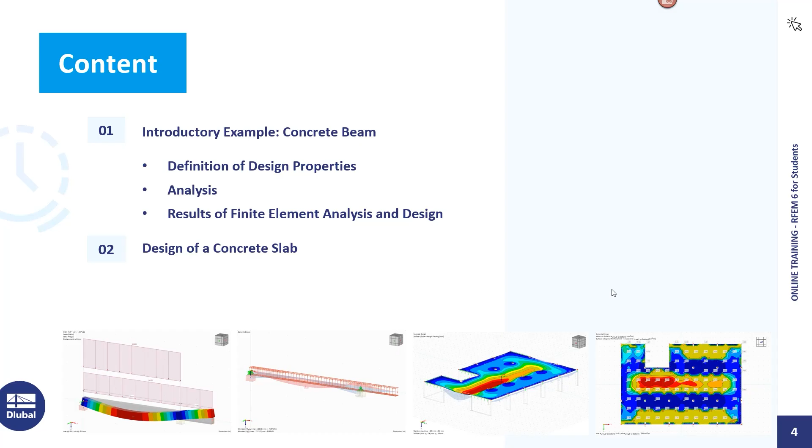Now we will go to the program. We have here our RFEM 6, and we will open a new model. We have this button to open the next model, and the first thing we do is come to the base data where we can give it a name, and this will be our concrete beam. This is the name, and all the default settings in this register we will keep.

Now we go to the next register, which is about the add-ons. RFEM 6 is a finite element program. With that you can do the finite element analysis for your model, calculating inner forces, deformations, stresses, strains. If you want additional analysis, you can add the add-ons here, and today we want to do the concrete design, so we have to switch it on. With this action, the main program will be enlarged, and it will get the options for giving input, the analysis, and the results for the add-on you activate, added directly into the main program.

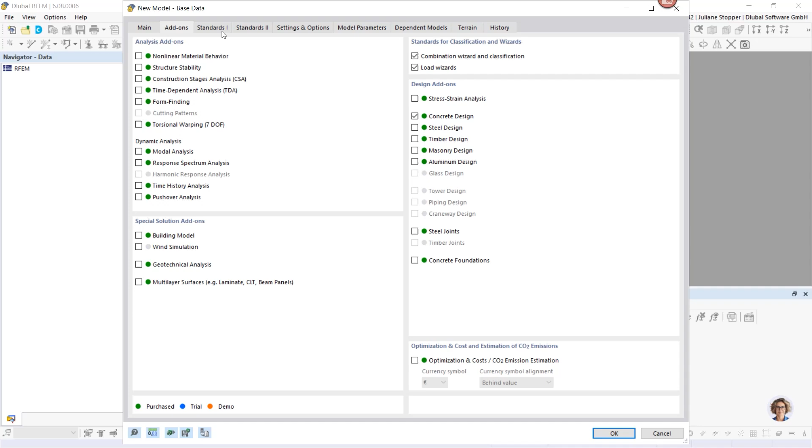What we need to do for concrete design is go to the standards, as we have to tell the program according to which standard the design shall be done. We have here the Eurocode and the National Annex. We keep these settings and agree. Now our model is prepared, the file for it is prepared, and it is empty. I will open this more so we can see it bigger.

I want to show you the files in RFEM 6. They always provide some default options. The program keeps in mind which materials and which sections you used the last time. It can help for a new project, but for us now we want to start from scratch.

Therefore I delete all these objects so that we can start in a fresh file.

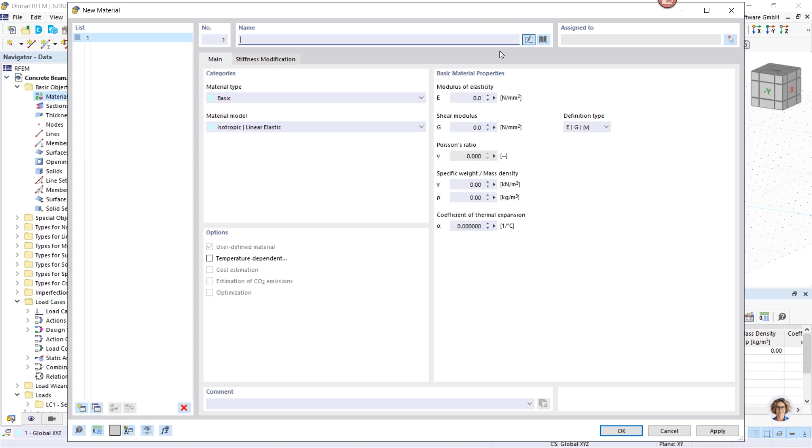So what we do now is we go to the materials, and here we create a new material, and we provide here the library. We can go into here and select our concrete, and it is important that you take care that the standard according to which you want to do the design matches the material you select. So we have C30/37. I accept that and go on apply.

Then I can see also here on the navigator that it is added. And I want to have another material.

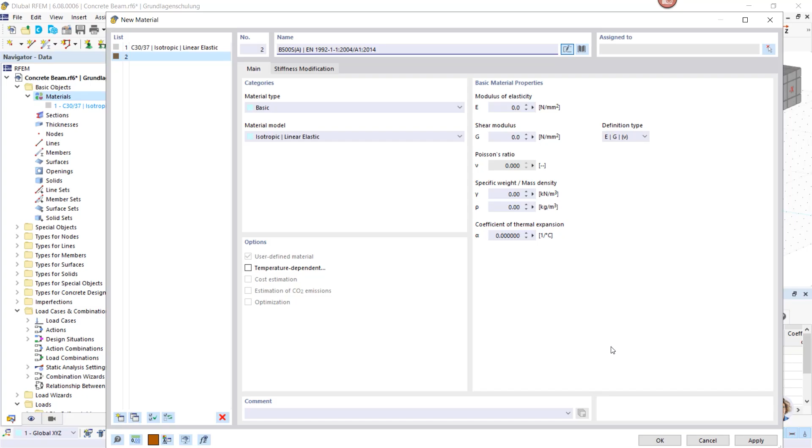I also need the reinforcing steel, and I want to show you another way of giving the input. If you know the name, you can also directly enter here the name of the material and then take it from here. I want to take this one, and it does the same actually. You give the name and then it takes the input from the library, but it can be faster if you know the names.

Okay, now we have the materials assigned, and you can see that it is written in blue letters here. This means that these objects are prepared in that model, but they are not in use. We will later see that if there are objects used in the model, then the letters will be black. So it's a good way to make it easier to control, to see if you missed the assignment somewhere.

Okay, then we can go to the sections. We want to create the section for our beam, and this is the dialog for it. Equal to the materials, we also have a library for sections. You can enter here, and you can see a lot of different sections we provide in RFEM.

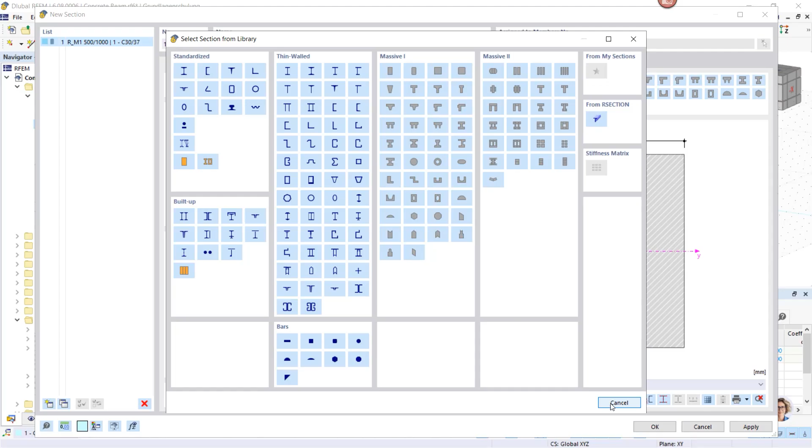But I want to cancel this. I want to show you here on the right side, we also have a list of common cross sections that are used. The program automatically adds here the first material of the list. It fits for us, since we want a section with a concrete material, and for this material it proposes these cross sections. We want to use the rectangular, so it's fine for us.

We can go to the next register where we can enter the geometry for our section, and we will have 300 in this direction and 450. And I can say OK. And then I have my cross section prepared, and you can see it uses the concrete, so this became black here.

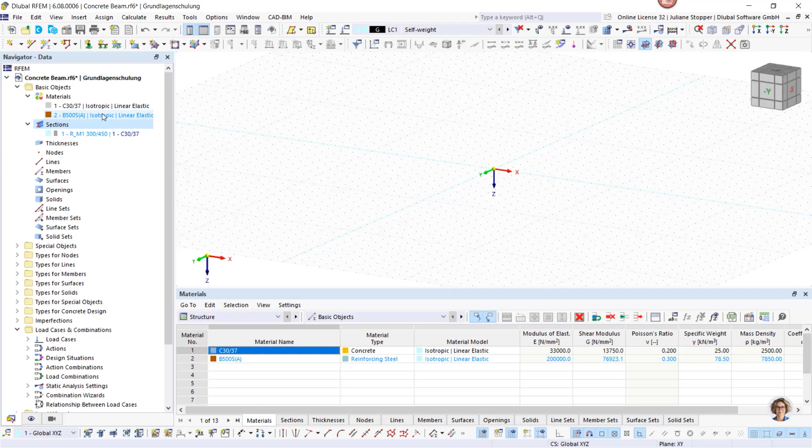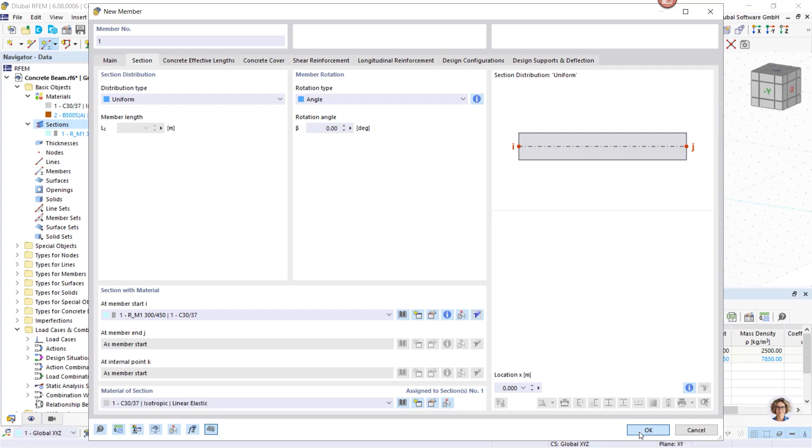And now we can directly model our beam. We have therefore here this menu, this button, to create a new single member. I click on this and I create a member, and I can also check here the section - yes, this is the section I did define. And now I can start, and I have the grid points here. So I want to start at 0, and our member shall be 8 meters long. With the grid here, it's quite easy to find the 8 meters. I click on the grid point and my beam is defined.

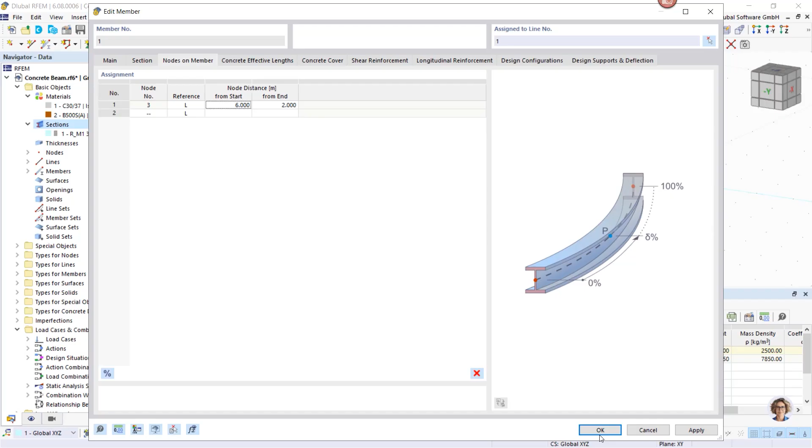Now I want to add a node in here, in between, in the member, and we have a special type of node we can find. For example, if we do a double click on the member, we come back to the member menu, and here we can use the option to define a node on member, or more than one, but we only need one. As I activate this option here, this register comes - you can see it's not here, now it comes - and I can enter the position of the node. I don't want to give the data in percent, so I click here and now I can give it in meters, and I want it placed 6 meters from start. I go on OK, and now you can see that here I have an additional node.

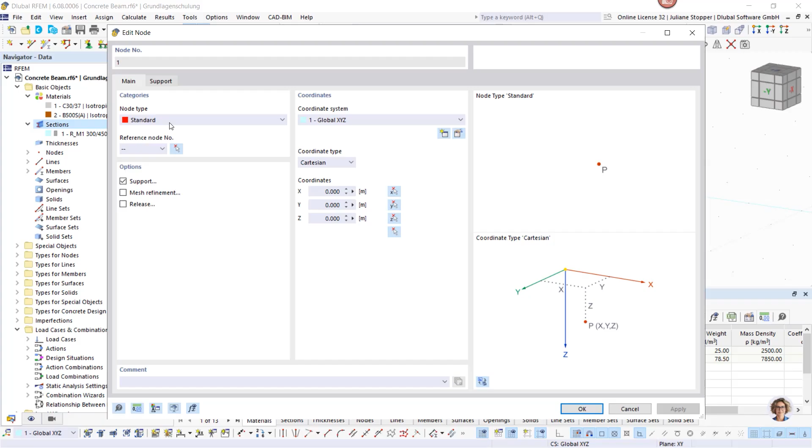Okay, now we have the beam. What we need now is to define the support. I select the member start, double click on the node, and I'm in the nodes register, where I have the option to assign a support. The special register for that option opens up, and here I can create a new nodal support for this node. I want a fully fixed support, so I go on OK, and then this node is supported.

We can see the green indicator here, and I want another support at this inner node. I go on support again and create a new support, and this time I want a sliding support. I use the one which is sliding in X direction, and I also want this to be fixed for rotation about the X axis. Okay, I go on OK.

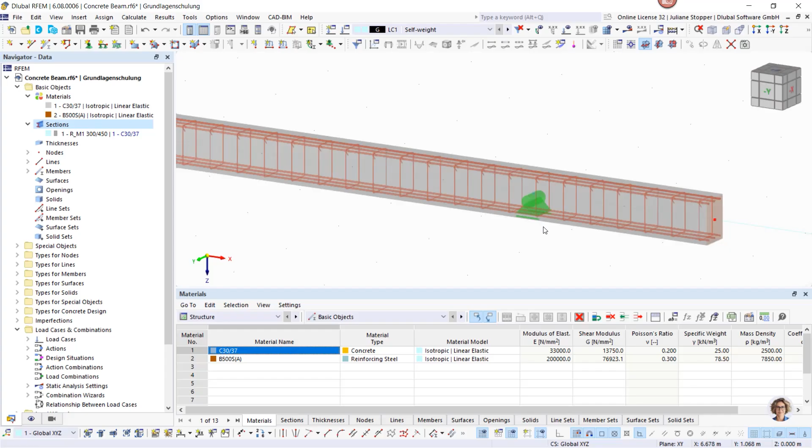With this node on member, we have the option that there is a node at that member, but this node doesn't divide the member into two parts. This is quite helpful if you want to do the concrete design, as the reinforcement will then work as for one member.

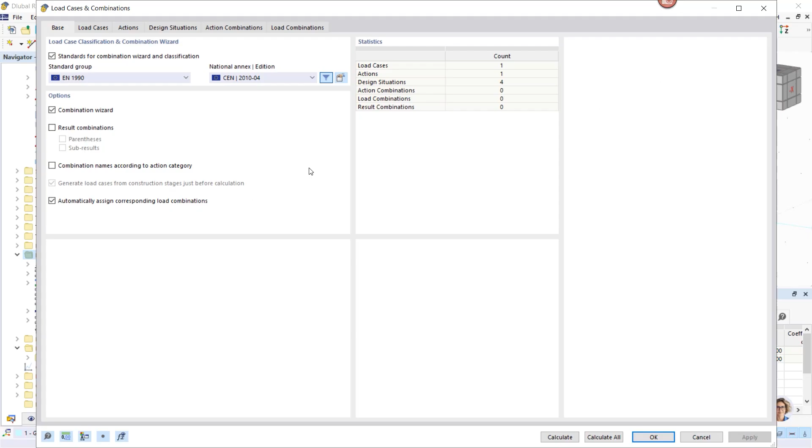Okay, now we have our beam ready. What we now need is the loads. So we go a bit further down in the menu, and I right click on load cases and combinations. We see the dialog here with the load cases. What the program provides as standard is a self-weight load case, and we have the self-weight active.

Now we add a further load case, and I want to have a dead load case, also from action category permanent. I go on apply and create a new load case, and this will be a live load. I select this action category - it is important to select the proper action category, as it decides how this load case is considered in the design situation in the load combinations. So this is my live load, and I call it live load 1.

You will see later why, and I copy this load case and create live load 2. So then I go on apply again, and then it is in the model. Now we can go to the next registers and have a look at them.

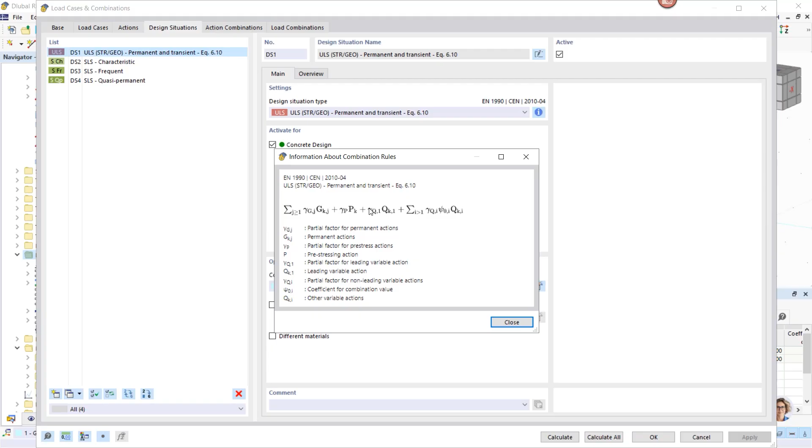Here we see a list of all the action categories we have in the model, an overview. Then we can go to the design situations, and these are the design situations used for the different design checks. You can always click here on this info button for all of these, and there you get the info about the combination rule used for creating the load combinations, so it can be followed.

And we have here the frequent design situation. You can see that all of them are now used in the concrete design, and I can also deactivate it and say this design situation I don't want considered in the concrete design, as I don't need it right now.

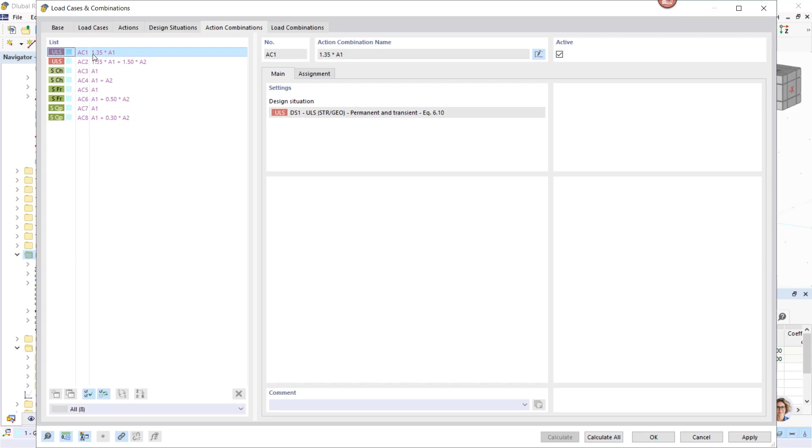Then we can go to the next section, where we see how all the action categories in our model are combined. And then we can have a look at the load combinations. This is the list of all load combinations automatically generated for us, as we have the combination wizard assigned. If you switch it off, you can manually define combinations for this design situation. If you have it active, as we saw, the load combinations are generated. I go on OK, and all my load combinations are prepared.

Now we have to fill these load cases that we have prepared with loads. We look here, we have a different folder for every load case, and we now go to the dead load. I want to define the member load, and I use this button here, new member load. I go on and start with the dead load.

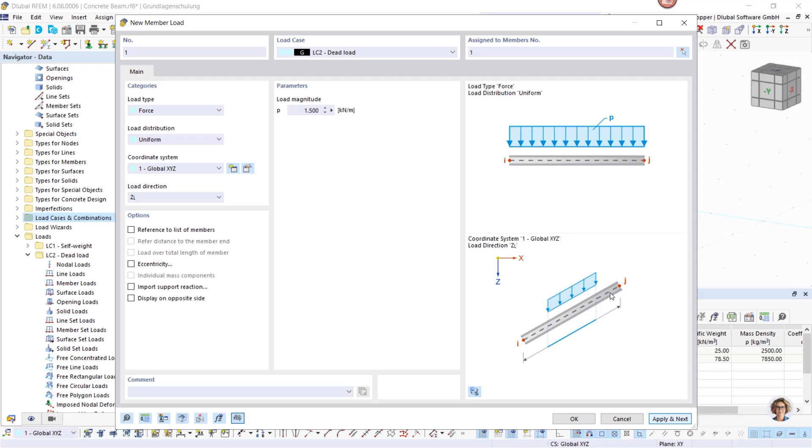I can select the member, and I want to have 1.5 kilonewton per meter assigned, and in that direction this is fine. All these settings can be kept. Now we have this button, apply and next - I want to use it because I can then stay in that dialog, and we can have a look here at the background. The load was defined, and now I can go to the next load case and define my next load, still for member number 1.

Now I want to use another load distribution. I'm using trapezoidal, and I use 20 kilonewton per meter at the end and at the start, and the load shall reach from the beginning up to 6 meters.

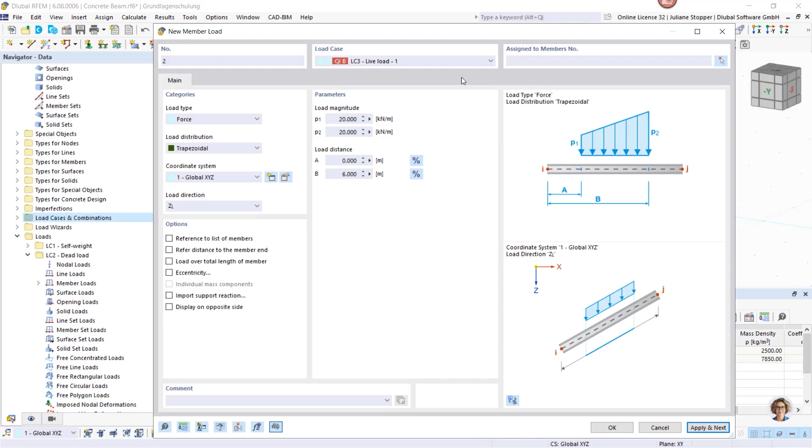I go on apply and next. Now I can see that this load case, the live load for the first span, is defined. Now I can go to the second, member 1 again, and change it here. It shall start from 6 meters and reach out till the end of the beam. I can now go on OK, as it is fine for me to leave that dialog.

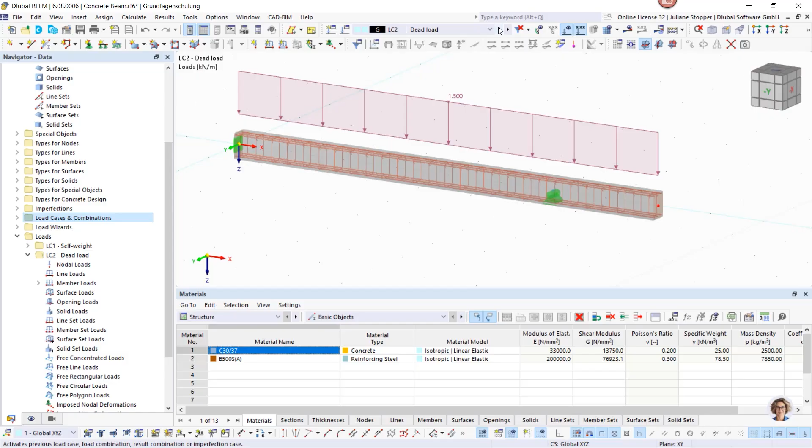So now we can check them. We can go backwards. We have this live load, we have this live load, we have the dead load, and we have the self-weight load case. It was the one with the self-weight active in the dialog.

We can also see that if we go here on the navigator for display, and here in the loads, in this navigator you can control a lot of settings for the display in this main working window. We can here activate the self-weight, and this is the self-weight that is automatically calculated for us with the cross-section and the material's weight. Here we can see what the program calculated.

Then we can also see here our load combinations. The program shows us the factorized loads, and we can have an overview about what is assigned in this load combination.

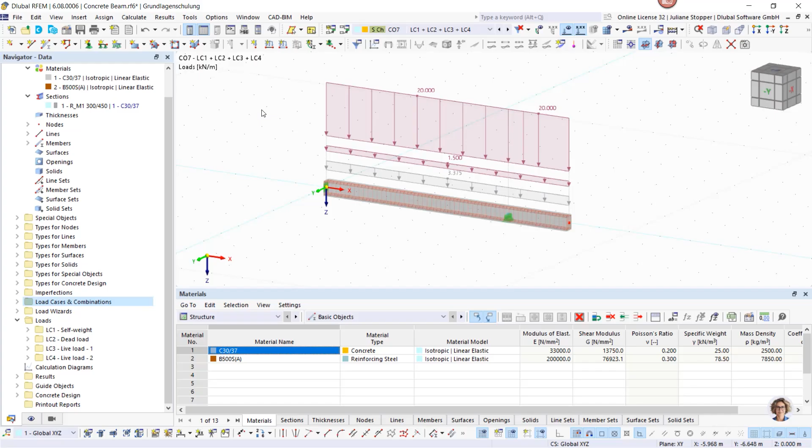Now we are at a point in the modeling process where we could start the finite element analysis. We have a system, a structure that has boundary conditions for geometry and for loads, and the finite element analysis could be started.

But as we want to do the concrete design as well, we will now have a look at the design properties for concrete design. Therefore, we go here to the member, and we can see here the design properties. This appears here as the program has the concrete design active, and as soon as an object is of concrete, then these properties are available.

And we could also switch them off. Then we would see the pure dialog for the member, how it would look for the member. And if we have it not active, this member would not be part of the concrete design, as it has no concrete design properties. But we want it to be designed, that's why we switch it on.

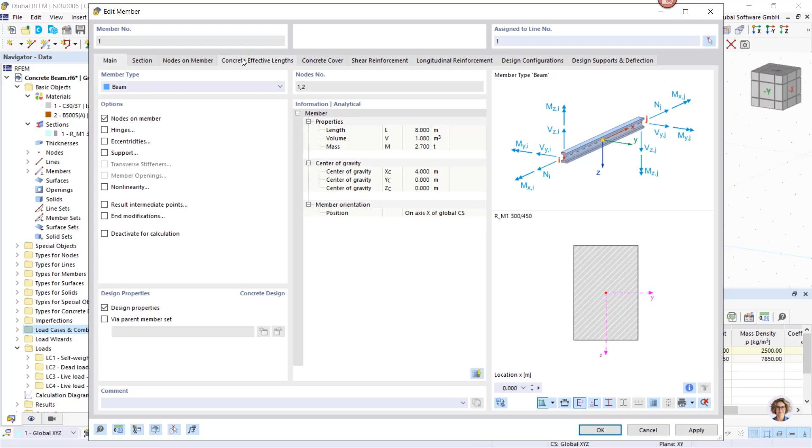And then we can go through the concrete design registers. So the first option is to define an effective length. This effective length is used for the stability design with the equivalent member method. And as we now have the beam which has no stability problem, we don't need to use the equivalent member method, and therefore we don't assign the effective length here.

We can go to concrete cover. This we need. We can give the concrete durability. We have a default value here, and with this button we can go on edit and have a look at it. Here you have this helpful graphic, and you could also change it if necessary, or add further exposure classes, and also set additional options if you need. But we will keep the standard settings, and we will go on.

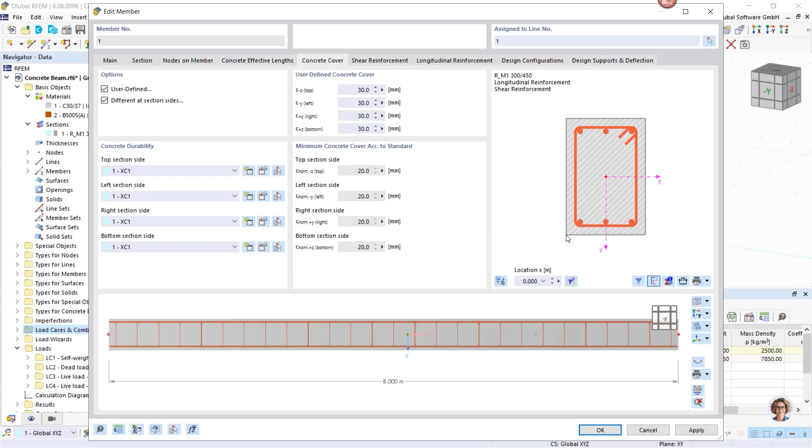If we have the concrete durability defined, then the program can automatically calculate the concrete cover according to the standard that we have selected for the design. But it is also possible to give a user-defined concrete cover, and it is also possible to define it different for the section sides. This can be needed if one part of a column, for example, is at the outside of the building and one part is at the inside, or something like this. But we keep the default setting.

Then we can come to the reinforcement. The first register is for the shear reinforcement, and for both reinforcement registers we have here at the beginning the type of reinforcement that we can select. We have the stirrup type, and we have now a 2-legged stirrup, but we also provide 3-legged stirrups. We stay with 2-legged. And here's the material.

The material is automatically the first reinforcement material you have in your material list, selected here. It is assigned here, but you can also change it if you have further materials in your model. Then you can define the stirrup parameters, and we want to use 8 millimeter stirrups. You can also define the distance for the stirrups, and if you need, you can also define further fields of stirrups, with different stirrup reinforcement area in different parts of the member. But we keep now the setting that we have one field along the whole member.

Okay, that's it for now. We keep it like this for the shear reinforcement. We can come to the longitudinal reinforcement.

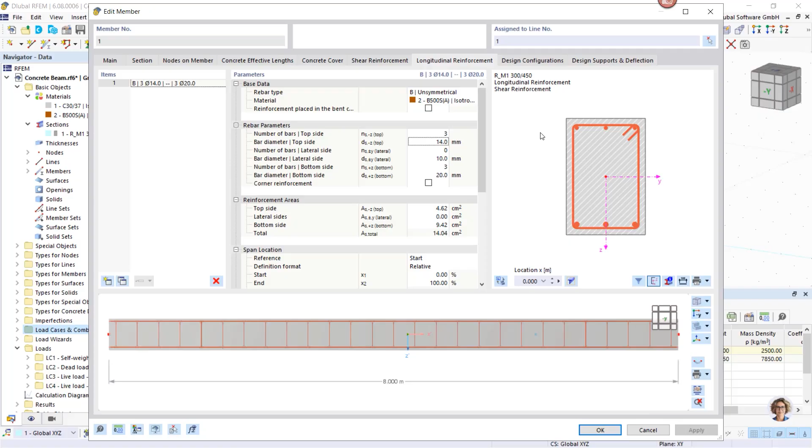Again, it also finds the reinforcement material, and we can also see here the reinforcement area as information. Then you can check whether it fits to the values you would like to have. And the same was available here also. You see also the area for the stirrups. Yeah, this is the reinforcement we want to use now in our example. I go and apply once in a while, and then we can go to the next register.

Here we have configurations assigned, and we can go into the ultimate configuration. Here you have selected all the settings that we provide according to the design, according to the selected standard. There are several options provided also in the standard and also in our program, and you can go through these points and select the settings that fit for you.

You can, for example, unselect the detailing rules for the members if you wish to have a design that is led by the ultimate state, but you also can have it activated, as it is here, if you wish to consider the minimum requirements of the standard and so on. We have here also the option to do the design for the shear joint, which we don't need here.

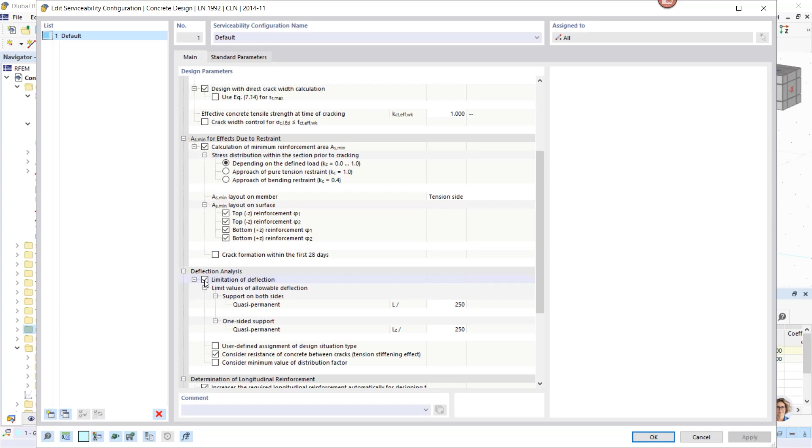For the rest, we keep the default settings. And we have it similar for the serviceability limit state. Here also you can select which checks you want to do. We have the limitation of steel stress active, but the concrete stress not yet active. You can activate it, and you have the minimum reinforcement area for crack limitation, and we can also activate the limitation of deflection. I will for now not consider this.

You can select here what you want to have in your design according to that standard. Then we can go here to the design supports. Design supports you also need for the program. It is relevant for design checks. The program needs to know at which node the current member has a support and at which node it doesn't have.

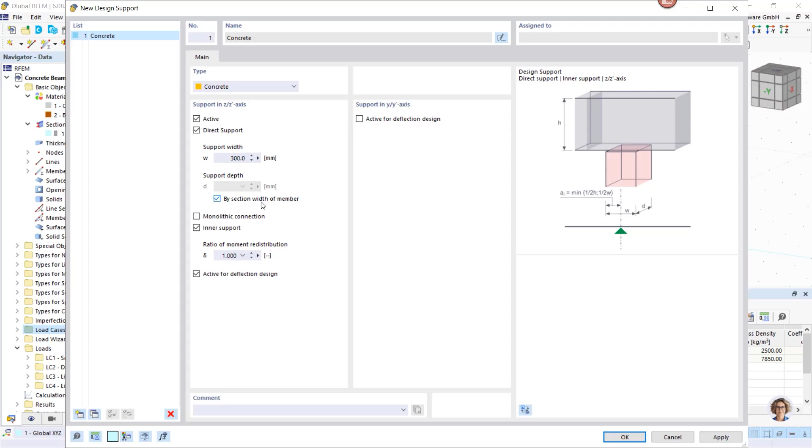Therefore, we go here to the member start and we define a new design support. It shall be considered in the Z direction, and it has that width, and the support depth it takes from the member width. And we have a monolithic connection, and there's no inner support at the member start. So we have this design support, and we create another one, which is an inner support. And we go on OK.

And we have the first support here, which was not the inner support. And at the end of the member, we don't have a support. We have a design support at the internal node, and there we can assign now our second member support. We can see here now the program knows our member is supported here and here for the design checks. We go on OK, and then we have it in our model.

Okay, I think then we are ready. Yes, we are ready. We can start our calculation, and I want to start it from here.

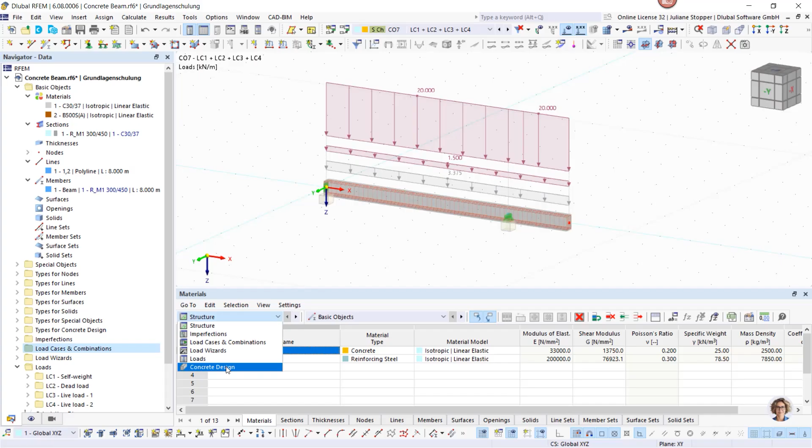We have here the table, and we have all these objects that we saw here, all the objects that we did define. We also have them in the table, and we can have the view of the table too. Sometimes it's useful to work with the table too. And here we can find the concrete design as well. Here you see the design situations that are now considered in the design, and here also you can switch them off if you say you don't want them now, and you can select the objects that shall be designed, and from here you can start the concrete design.

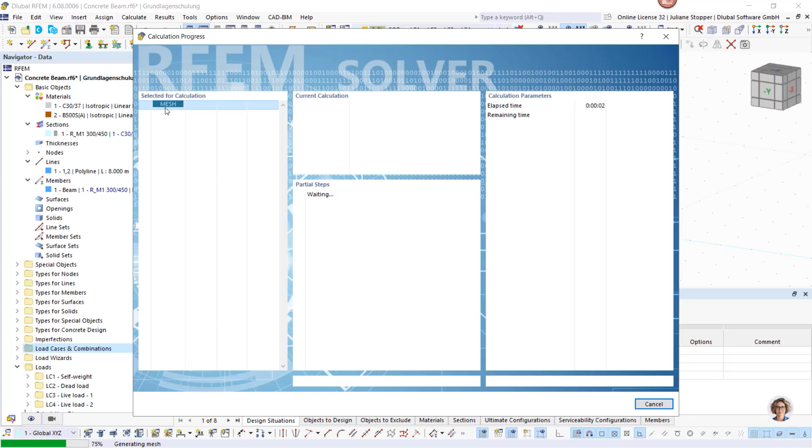I will click on it, and now the program starts with the mesh. And afterwards, the finite element analysis is started. The inner forces, the deformations, stresses, and strains are calculated. And then, as we have them, the concrete design is done with these inner forces. And now we see the result.

What we see now first is the overview for the concrete design. I start here with the navigator for results, and we are now in the concrete design. But it's always possible to go back to the static analysis. Here you can find the results of the finite element analysis, and you can check, for example, the deformations, whether they are plausible.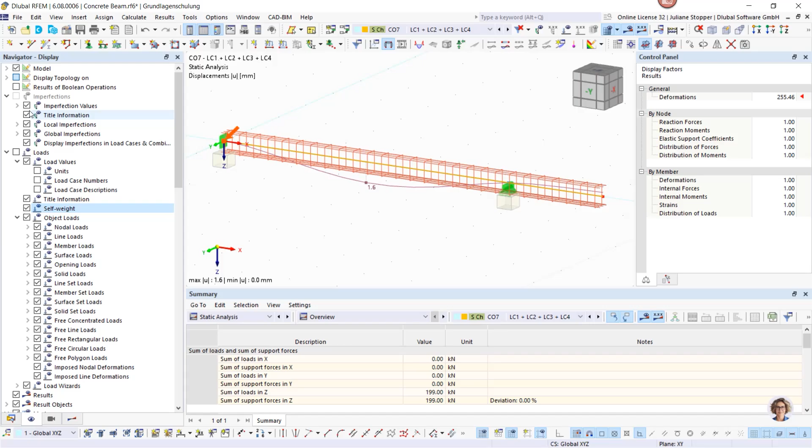Let's have a look at them. We can go on the wireframe model, and I want to switch off the reinforcement. I don't want to see it now, as I want to focus on our results. Now we can see more clearly the deformation, and we can also select here that we want to have the section colored, but we can also go back to lines.

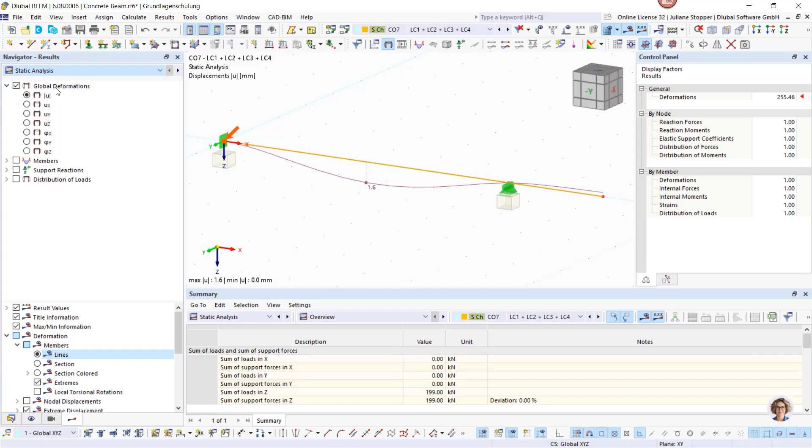So as we see, we can go to static analysis, and these results from the static analysis, the inner forces, they are used for the design. And what we have here is the overview. It looks relatively red because you are warned in that overview according to the positions where you have to work on.

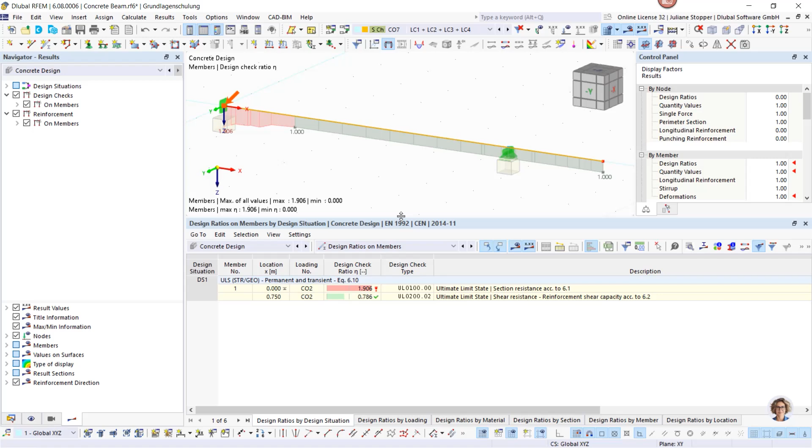But you can also go here on design ratios on members, and I will show it. It is relatively a lot, and you can also deselect options here. We have now here the ultimate limit state results, the serviceability limit state results, and also detailing checks. And with these buttons, we can select what shall be shown in the table. I don't want to see now the constructive rules, the detailing, and I don't want to see the serviceability limit state now. I want to work on the ultimate limit state.

And we can see that we have here a value reached. The safety is not provided in that ultimate limit state. And this is our section resistance check. I guess it is caused by this support, by the moment we have here from the support.

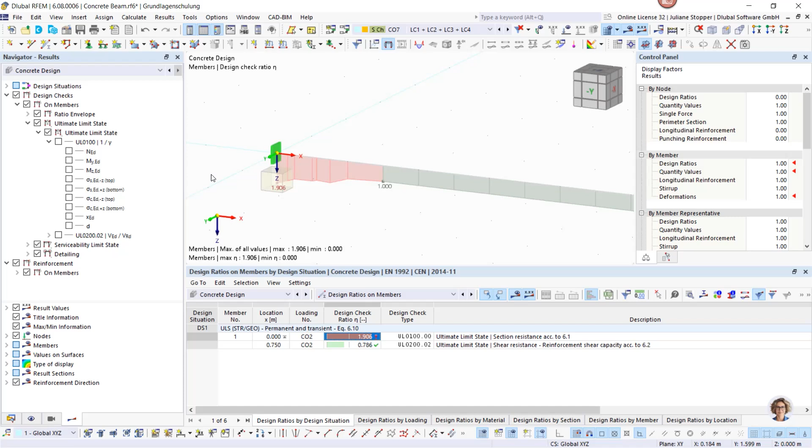And we can have a look. Here we can see the design check. This is only the UL100, and we can see that we don't fulfill the check here. But we can also have a look on the reinforcement, so I switch off the design check and go to the reinforcement.

And here we can see the required longitudinal reinforcement at the top and at the bottom. And we can also have a look at the provided reinforcement at the top and at the bottom. And there we can see that our problem is the top side. So it's really the support, the moment from the support. We have tension on the top side, and for this tension our reinforcement is not enough.

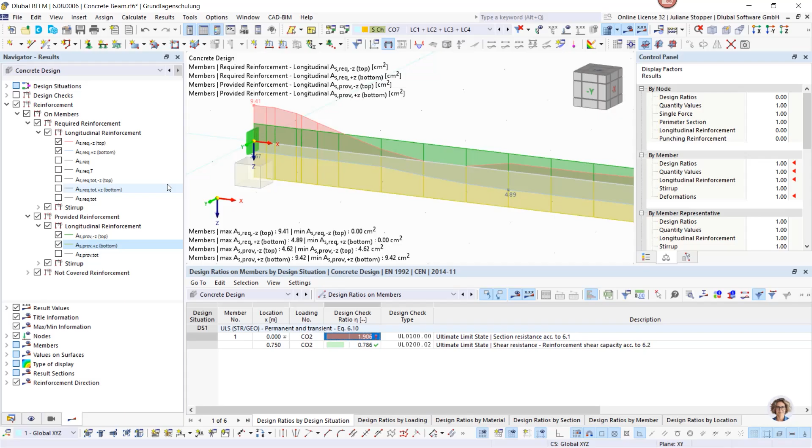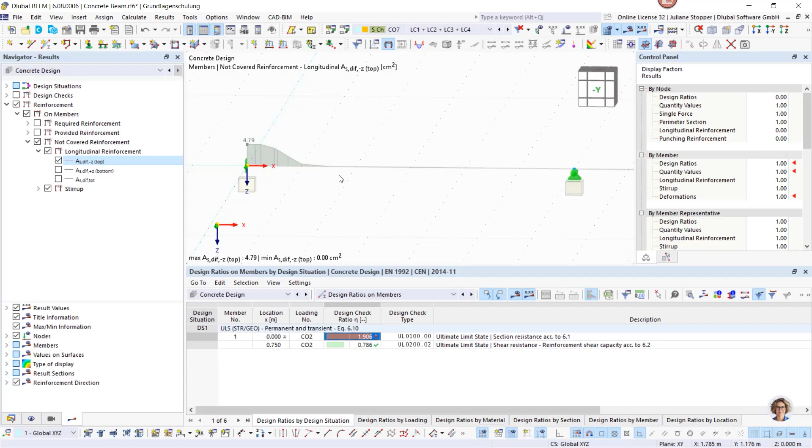You can check it like this, if you look like this, but you can also directly go to the result, not covered reinforcement. Therefore I switch off the required and the provided, and we just open this one. And there we can see that in this range the reinforcement is not enough. Now we will modify our reinforcement in order to fulfill this check.

So therefore we can go here directly. I did a double click on the member, and I get back to the members dialog, and I saw that I need 4.8 centimeter square. So we have 4.6.

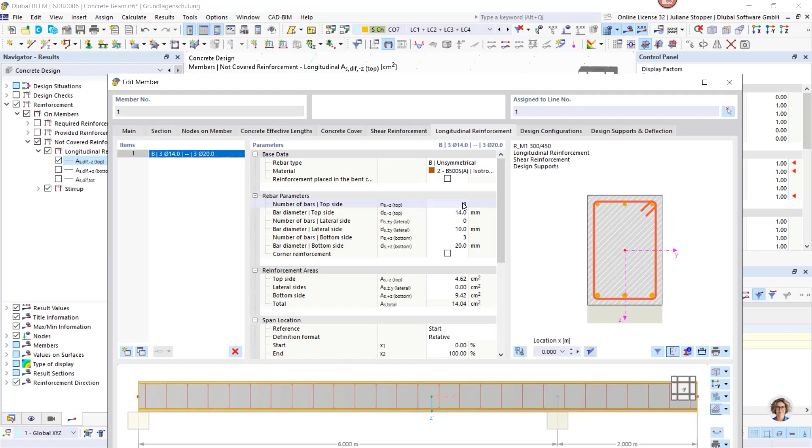So I want to use, I copy this reinforcement item, but I only need additional reinforcement at the top side. So I set this value at the bottom side to 0. And this is not enough, therefore I go to 4.

And I have it now in my member. And what I see is that now this item is placed along the whole length. This I don't want, I don't need it. We saw it's a very limited zone.

So I can here define the span location, and I want to do it absolute, and I want to start from 0. This is good, but I want to go only to 2.5 meters. And there we can see now it is only in here. This is what I want.

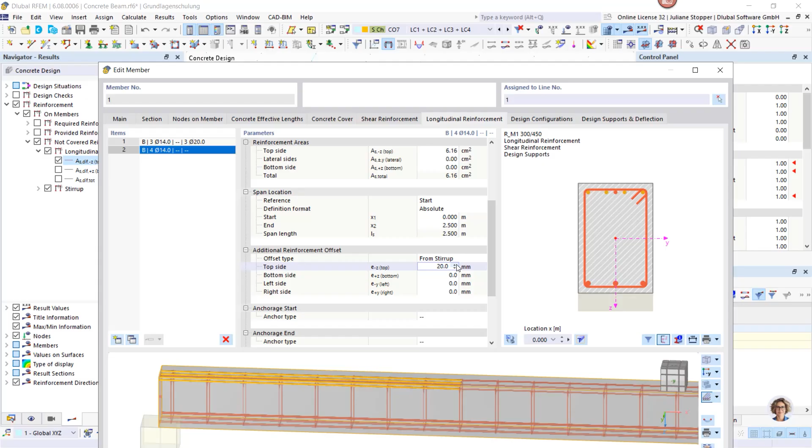And I can see that it's in the same layer of reinforcement, and I want to use an offset. This I can do here too. I go on offset from stirrup, and I go from the top side 20, and now I see it's better.

And this reinforcement I want to use now. Sorry, I want to go back to the dialog. One thing I wanted to show: if we are in the reinforcement register, we can also click on this here.

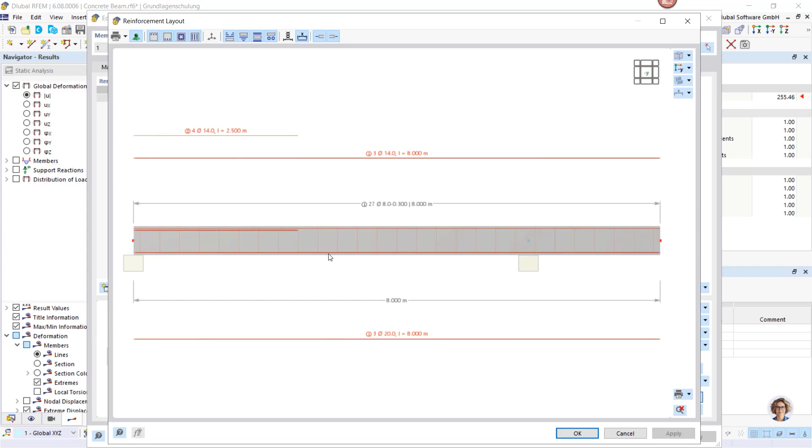Here we can see the reinforcement layout, and this is a good overview about all the reinforcement positions you have in your member. And this one you can also print. You can also use this as a template and do multi-print for this setting. Then you can print a lot of members with one click, with the same layout style.

We go on and redo our design. As we saw, static analysis results were not deleted, they were still valid - only the design is redone. We are now in the not covered reinforcement check, and we can see these values are 0 now. So on the top side and also on the bottom side, there is no not covered reinforcement, which is good for us. We can also go here on ratios on members, and we see the ultimate limit state is fulfilled now.

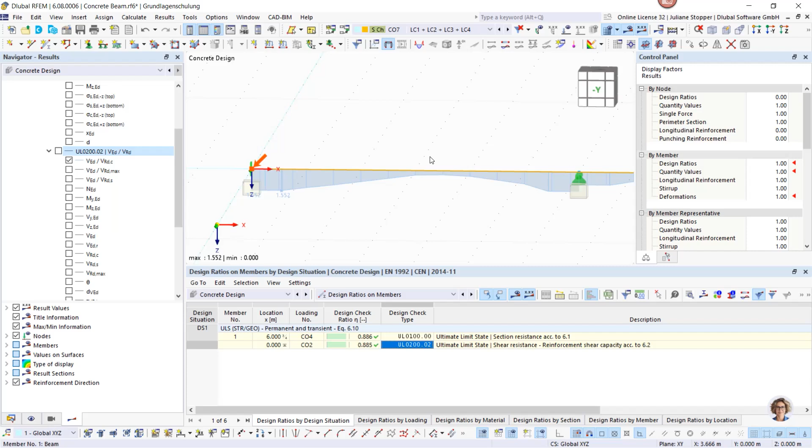I want to have a look also shortly on the shear check. The shear resistance is checked in this second check in the UL 200, and we can have a look on it here, along the beam, and we can see that it is fulfilled quite well. We can also have a look here - this is the ratio for the shear force with the shear resistance without reinforcement, and we can see it would not be fulfilled here. Then we have also this check, and there we see finally the total check is fulfilled for shear resistance.

What I want to show now is that you always have the option to see more details of the design check. You can do a double click on the design check, and then you can see what is done in that check. We don't provide a black box - we fully document how the design check is done.

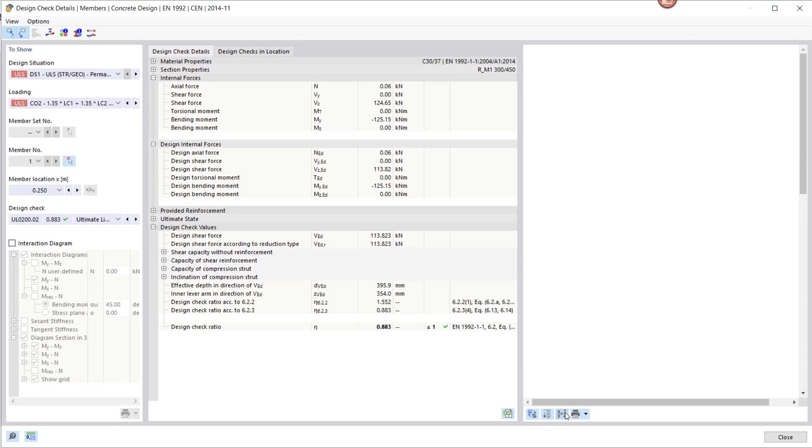So here now we are in the design check details, for that check we had a click on. We are in the 200 for member 1 at location 0.25, and you can also switch through it to further X locations. On the right side you can see all the formulas that are calculated within the design, and you can switch off the values, then you have an overview about the formulas, and you also have here the reference to the standard. So you can quite detailed follow the design check and also see it with the values you have. It is quite useful to check if there's a problem in the design check - if it is not fulfilled, you can see which value is leading, where you should work on. So these are our design check details.

You can also use this button here, it's helpful too. There you can see the stress state of the current member's location. We can see now here at this location we have tension on the top side and compression on the bottom side. You can also check dimensions here, different settings, and you also can print this.

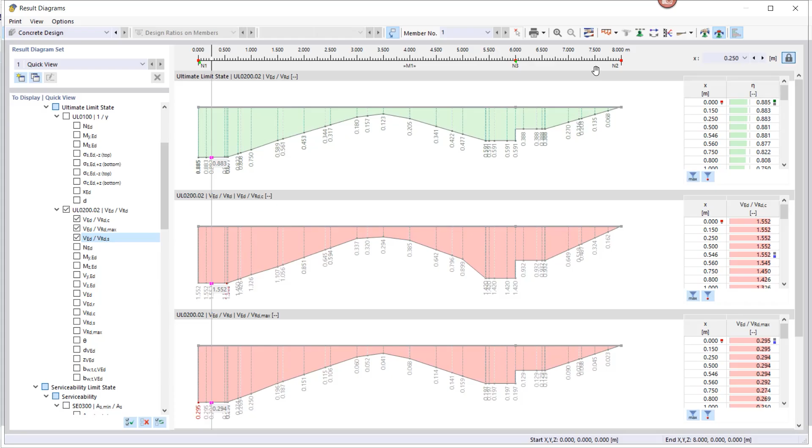And then you also can come here to that result diagram. Here with this design check details you are at one location in the member. Now if you open this one, you can see the current design check along the whole member, and you can see how it behaves through the member, how it develops. So this one you could also print, and you can add some information you want to know here. You can check and print it from here to the printout report, directly, whatever you need.

Yes, this is it for here. Let me check whether there's something else I would like to show. No, that's it.

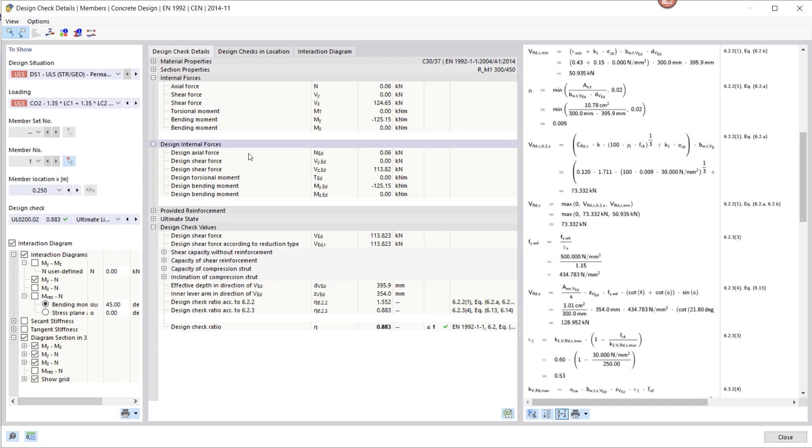We have here also the interaction diagram - this as a very short note. You can also check the state your cross section is in here, in detail. But for now it's enough for the member. I think we are ready - we finished our introductory model.

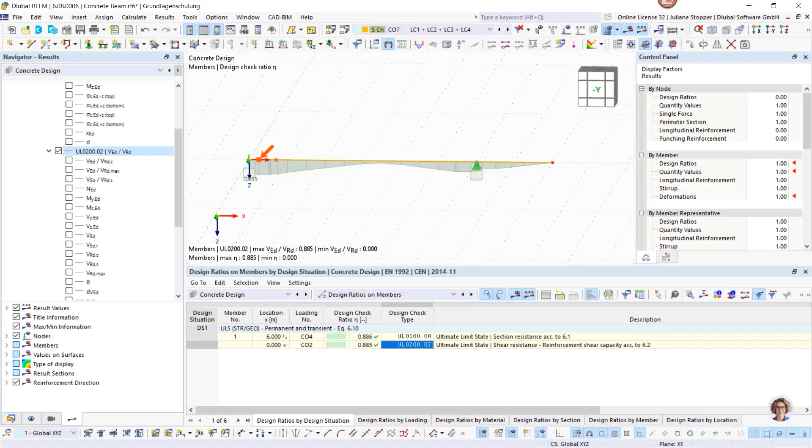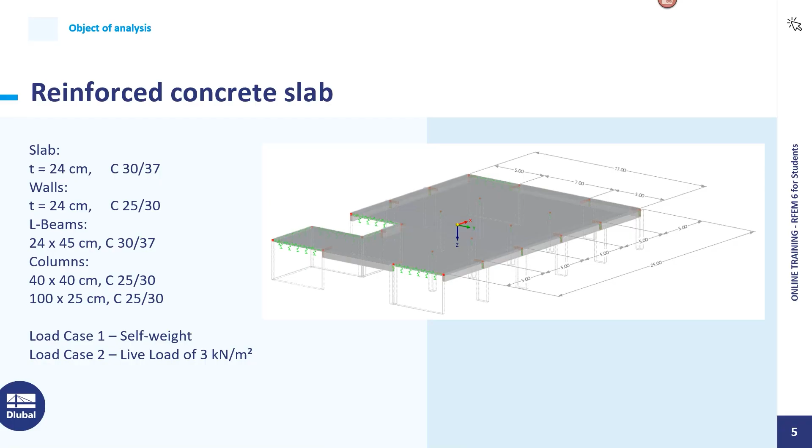Now we open the model for us - we have it here. For this model, I have the structure prepared in order to save some time and spend the time with the concrete design. So as we can see here, we have the concrete slab.

We have our materials in the list, and we have sections, and I want to go to the section. This is the section for these L beams, and we can do a double click here. For this type of beams,

we have in RFEM a special member type, which is called rib. If we go into here, we can see that we have now the member type rib used. Before we had the beam, as it was a single beam, but here it is a rib. This means we have the working together, let's say, of that member and the slab, which is within the effective width of the member. And here we have the special register for the rib, and here you can do some further settings.

You can select whether your rib is placed at the bottom side of the surface, or top, or at the center. You can use the auto detection. There the program finds for you the surfaces that are placed at the rib. It can from time to time be needed to use the manual definition. Then you can unselect the auto detection and so on.

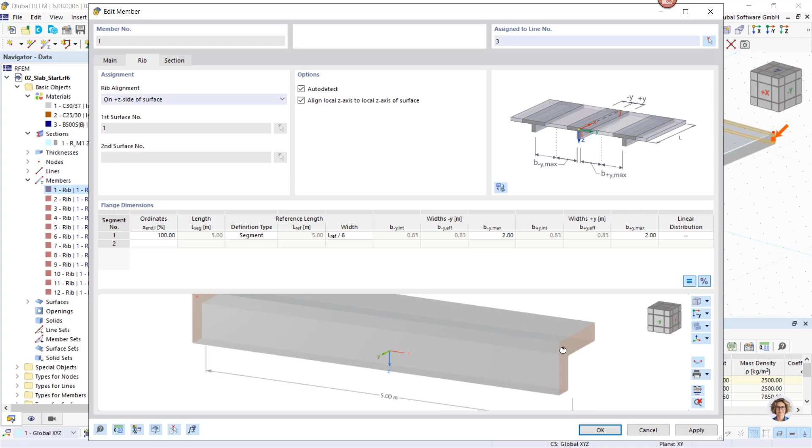Here you can do settings for the flange dimensions. And here you have the overview. It has here the design properties provided as it is from concrete material, but I don't want to do the design for the rib right now. We want to focus on the slab.

So we have the section here and the rib members here. What we do have in that model too is the thickness. The thickness is analogously to the section for members. We have the thickness for surfaces that we can define here. We can go into the dialog. Here we can see the thickness and the material assigned, and it is assigned to the surface number

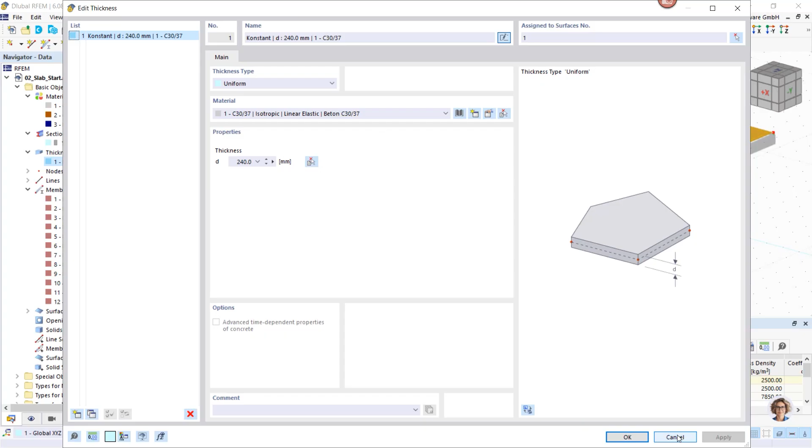1. And if we now, we can also see our surface here. If we go on that surface, we can see the surfaces dialog. Here we have the thickness assigned, and we can also see the material, and therefore we again have design properties active here. And yeah, as we are already here, we can go through it.

I can show this would be the dialog without design properties, and these are the additional concrete design settings. And we have here the concrete durability again that can be defined, and the automatic calculation of the concrete cover, and it can be user defined here too.

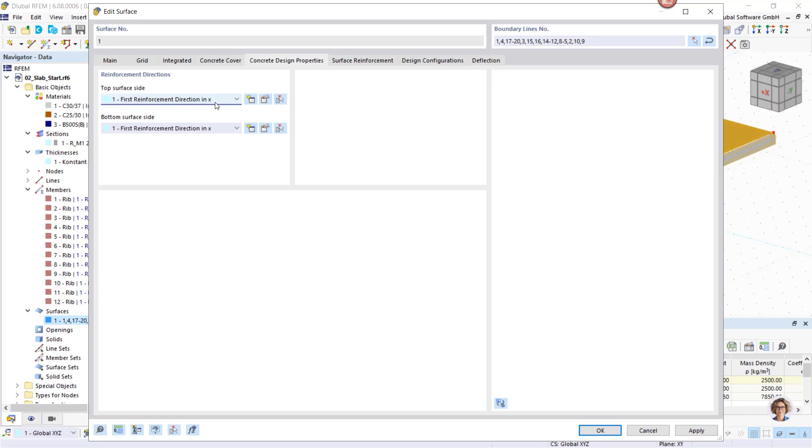Okay, then we can go to concrete design properties. Here we can select which direction of the local axis of the surface shall be the first reinforcement direction. And then we can come to the reinforcement.

Here we can define the surface reinforcement, and I can go on this button here and define a new surface reinforcement. We have here the type on surface, which means that this reinforcement is placed along the whole surface area. And we want to use the 10 mm diameter as diameter and the rebar spacing of 15 centimeters, and we want the same in the transverse direction.

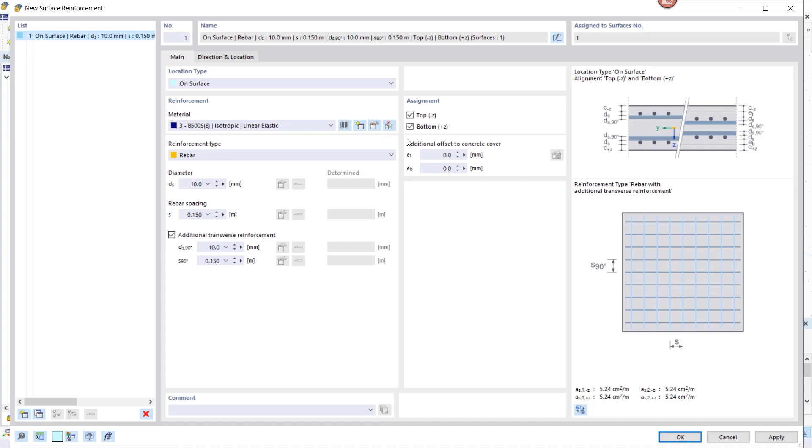And here you have the surface reinforcement area values. This reinforcement is placed at top side and bottom side. Yeah, and we can go on OK. And then we have it assigned.

Okay, and we have here design configurations too. Here you can go through again and select the options you need in your model. And here we have a deflection register that we don't use right now. Then our surface is prepared also with the design properties.

Now I want to show you something special we have. We saw in our graphic that this slab is supported by walls and columns. It is placed on them. But as we are interested in the slab only, we don't want to analyze these walls and these columns. But we want to consider the stiffness, and what we have in this case, and what simplifies the model, is we have special supports. And we have here line support, for example.

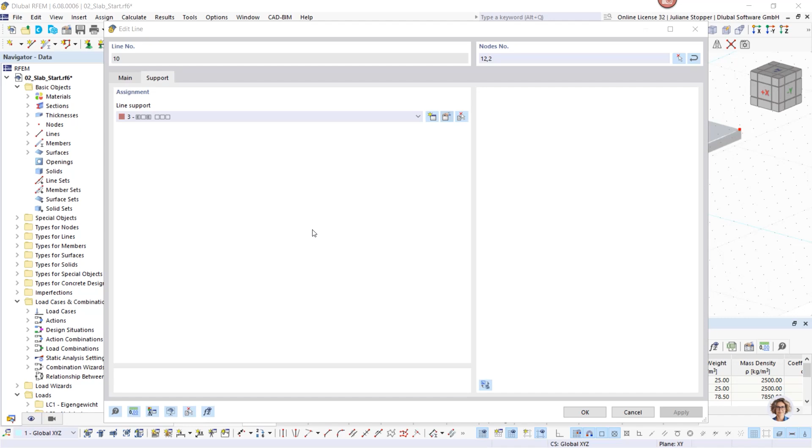I can do a double click on the line support, then I get into it, and this line support uses the option stiffness via fictitious wall, and this has this special register here. And here we can see that we can set the parameters of the wall, and then the program automatically calculates for you the support springs, the equivalent support springs due to this wall.

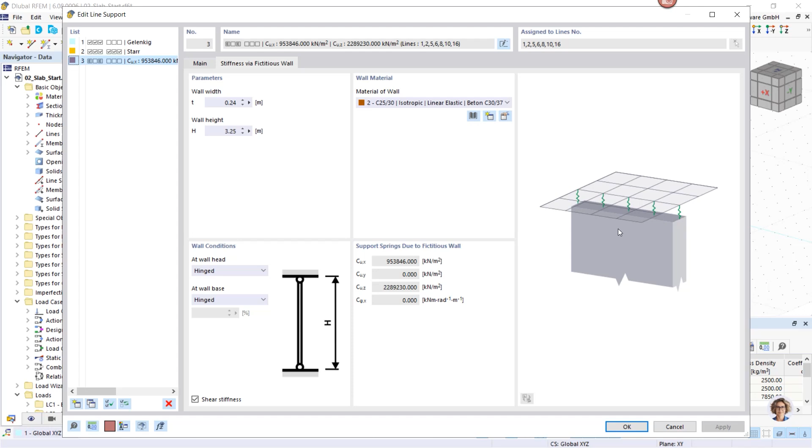So you have the stiffness considered, but there's no further analysis along all finite elements of the wall, because we don't need it in this example. So the stiffness is assigned, and the wall with its stiffness is considered as support. We have the same for nodal supports, not the same, but the equivalent thing. And these supports you can also find in the navigator. We have before looked at the line support.

The line support types are here for lines, and here is the line support that is in use in this model. We also have types for nodes, and we can see which nodal supports are in use. We can click from here, or we could have gone to them in the model via clicking.

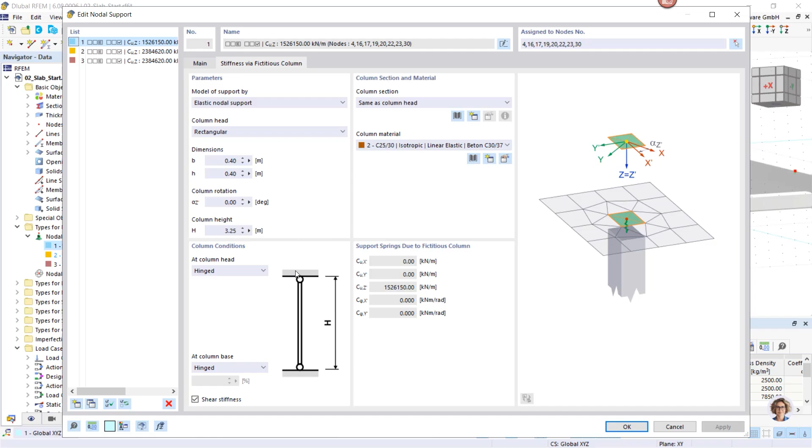Here we see stiffness via fictitious column, and it's the equivalent thing. You can give here the data about the column, the material, the dimensions, the hinges, and then the equivalent support springs are calculated and put in here.

We can have them active so we can see it better that we have the stiffness considered. We can activate the columns, and also for the types for lines, not the surfaces. We have here the walls.

Now we can see them. So this is how our slab is supported. Now we can check the loads, so we have supports, we have the geometry, we can check the loads.

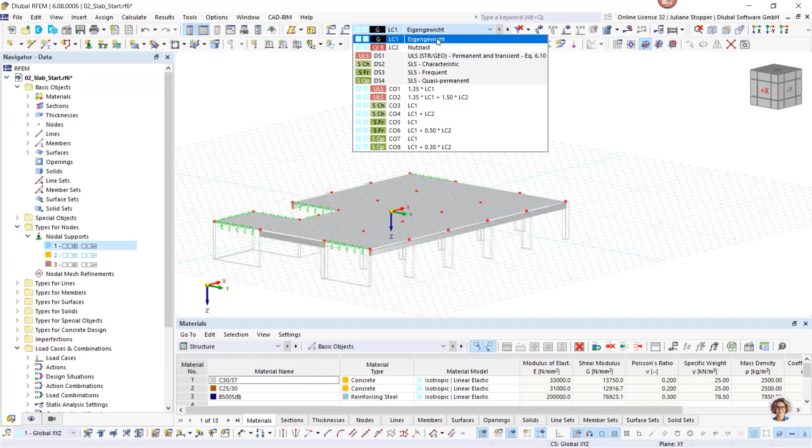We have self-weight and live load in that model, and here we can look at them. If we say show loads, we can see the self-weight that is considered, the live load, and we can see that we have load combinations in that model too.

Okay, that's it then. We can start now the analysis, and we do this again here with the table.

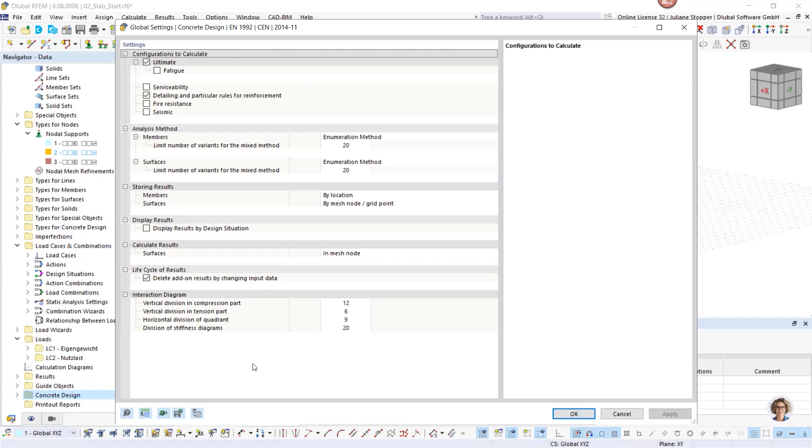Okay, we keep it like this, and we start the design.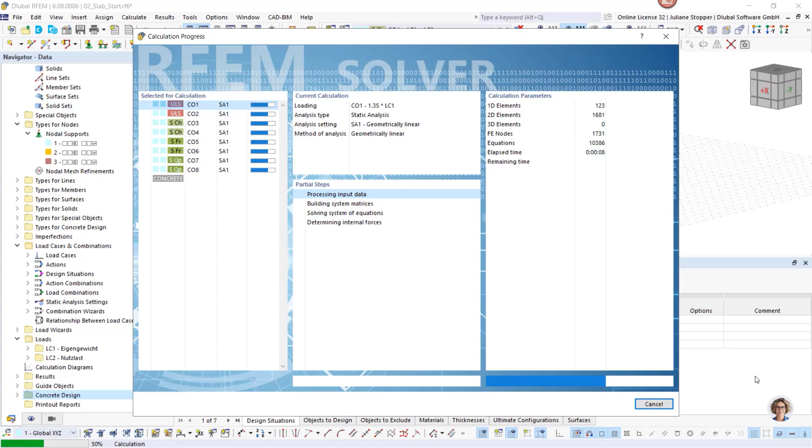The mesh is done first, and now the load combinations are calculated, and when the inner forces are solved, then the concrete design is done, and it is finished.

Okay, again I want to have a look with you at the static analysis and shortly have a look at the displacements, as it is a very good option to control the plausibility.

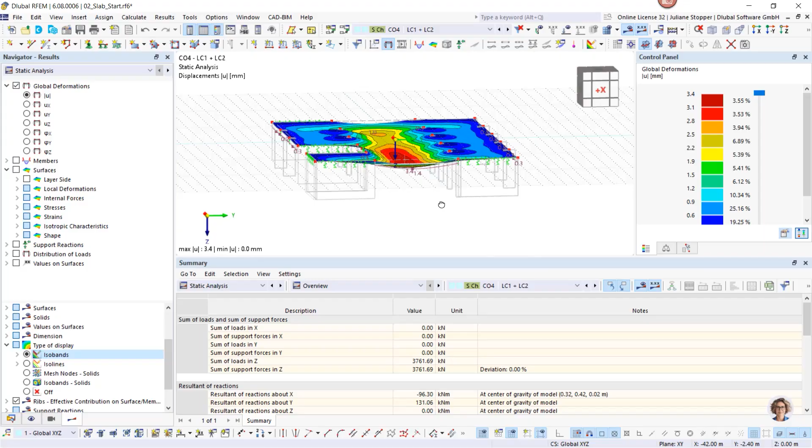So we are now here in the static analysis, and we can see that the displacements look plausible for us. All the supports are considered, the loads seem plausible, and the deformations fit to the loads from a plausibility standpoint.

Then we can go back to the concrete design now. I want to switch this off for now and go into this view. Now we see it from the top, and we again have this overview as a first result, and we see some red cases. Now we will go on ratios, design ratios on surfaces.

What we see now is, if we look here, we have the safety not fulfilled for the longitudinal reinforcement on the top side.

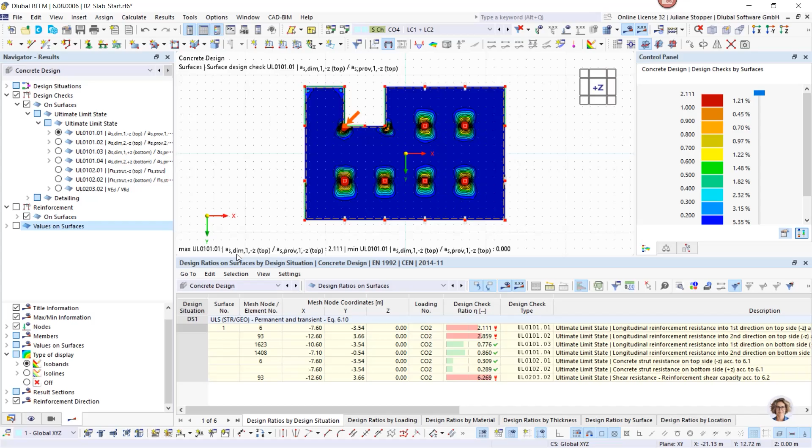So we can also go here. It's the ultimate limit state, and we see now the top side in direction 1 and here in direction 2. What we see is we have again at the supports a problem, so that's why it is on the top side. At the supports we have the tension on the top side, and here our reinforcement is not enough.

At the bottom side we have the maximum values in the fields and the spans, and we have the maximum here, but it is fulfilled. We see that there's no higher value than 1.

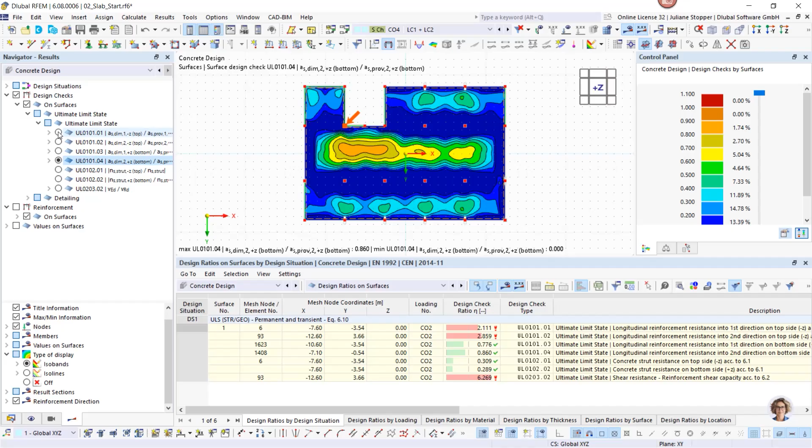So now we have to work on these points, and this we can do. We put some additional reinforcement here.

Therefore I go to the navigator for data, and here I want to collapse them. We also have this place where we can give a setting for the concrete design. In the navigator for display, the concrete design is placed here and here. Here we were with the global settings, and the configurations are placed here. And here we have types for concrete design, some settings that are collected here.

For example, concrete durability you can open from here, and here also our surface reinforcement. I want now a new surface reinforcement to be defined, and it is of another location type. It's a free rectangular, and it has these diameters. It shall be 16 millimeter with a distance of 15 centimeter. This is fine, I can see my values here.

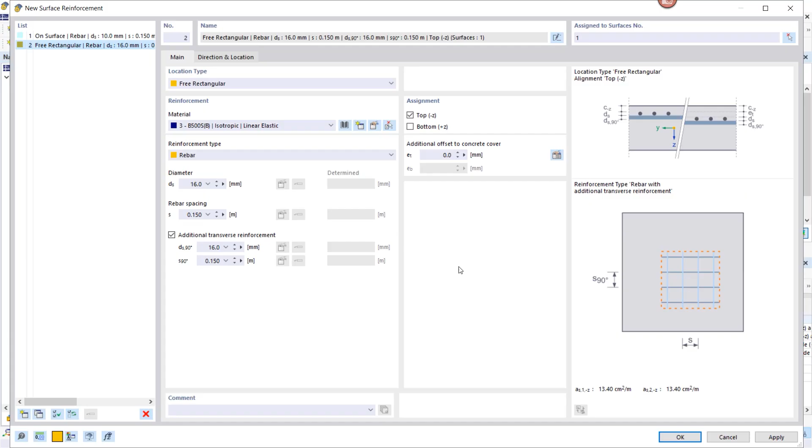Now this reinforcement is only needed at the top side, so I uncheck the bottom side. For this reinforcement type we have to give the direction and location. I want to use this setting, defining the center and the dimensions, and it shall be 3 meters in x direction and 4 meters in this direction. Now I select my first center.

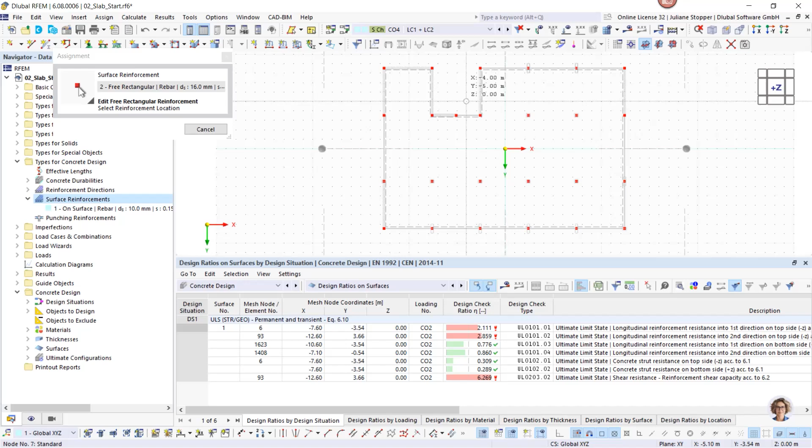I switch off the results, it's easier to see, and I use this one. I say OK - yes, the results can be deleted.

It's clear that the concrete design has to be calculated new. So now we can see our additional reinforcement, and I can work with it graphically too. I can select it, and if I press Control, I see this little plus, and then I can create a copy with drag and drop.

I want to do this - I want to have these reinforcements also placed here, and I want another one here. I did move the node too, like this. And I want another one here.

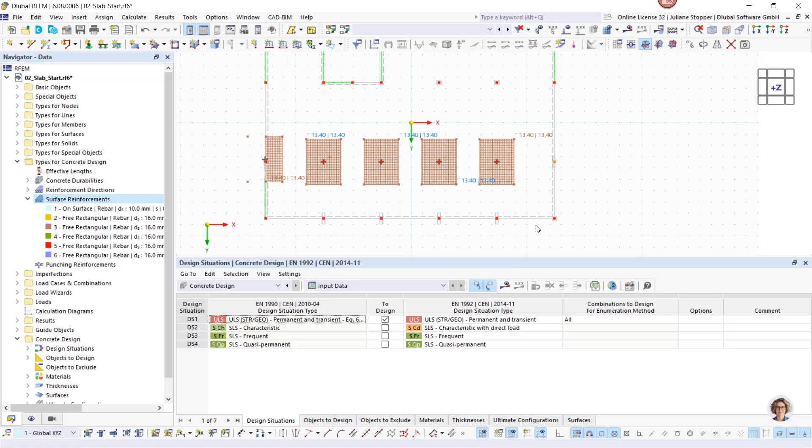And I want all these reinforcements to be placed here too. Oh, I didn't copy it. I press Ctrl and Z to undo this. Now I press Ctrl and I can have a copy - it didn't work, okay. I don't know why. I am doing it like this now.

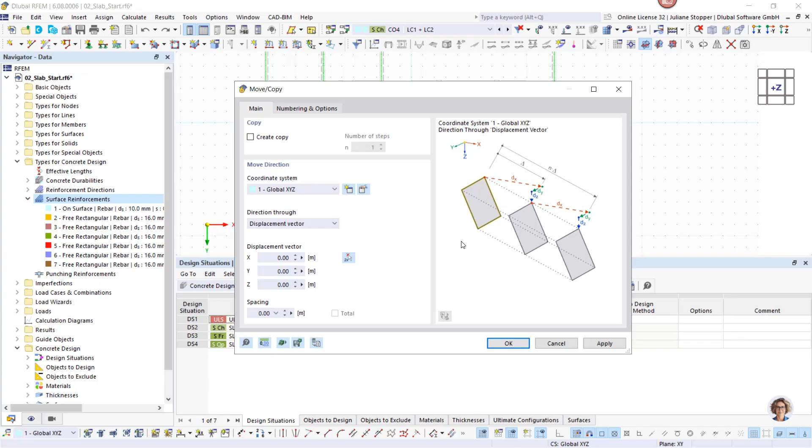I can also do a right click, say manipulation and copy, create a copy, and define the distance with this setting - like this I can copy it too. Now I have additional reinforcement at all the places where I wish it to be placed, and I can restart the calculation process.

Now I don't want to see the reinforcement right now, so I can focus on my graphical results. If we go on ratios on surfaces, we can see that these ultimate limit state longitudinal reinforcement checks are fulfilled, and we have the same options as for the beams.

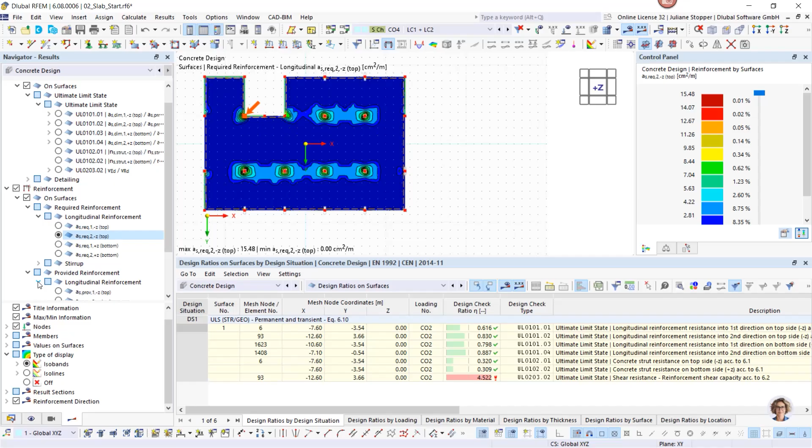For the members we can also check the required reinforcement - that was the required value, and we can see our provided value. We can also see that we have additional reinforcements here, considered in the provided reinforcement, and we can check the not covered reinforcement - there's no problem at the top side and also not at the bottom side, which is fine.

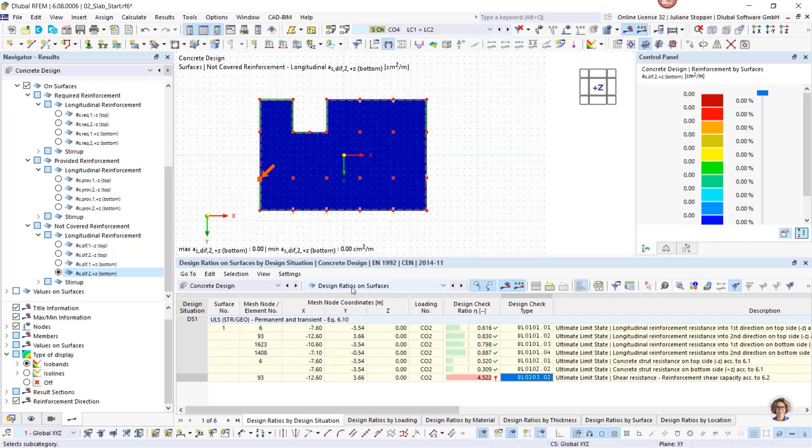What we have here is a shear problem, but this can be a punching issue, and for this location it needs to be checked more in detail - it could be required that we do the punching design. But this will not be part of today's training - it will come in the next step.

Okay, so that shall be it for today.

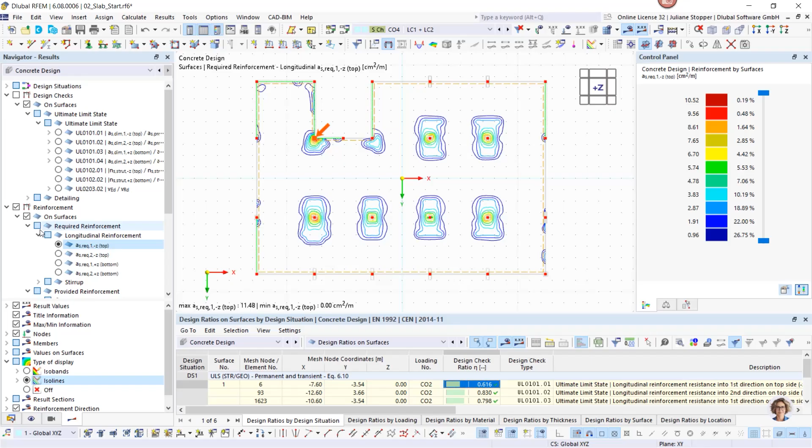Maybe I can show you one more short thing. This is again a result - we can see the longitudinal reinforcement that is required for that surface. As we want to print our results also for documentation, we provide options to modify the display at the bottom part of the navigator for results, and there you can select isolines for the surface results, which is quite helpful. You can additionally activate the values on surfaces, and with these values and the isolines it's easier to print. I wanted to show that.

Okay, then we are at the end with the topics I wanted to show within this training. I hope you got some insight into the options in our program, and there are a lot of further options provided you can get to know. But this is it for now. We will go back to the slide.